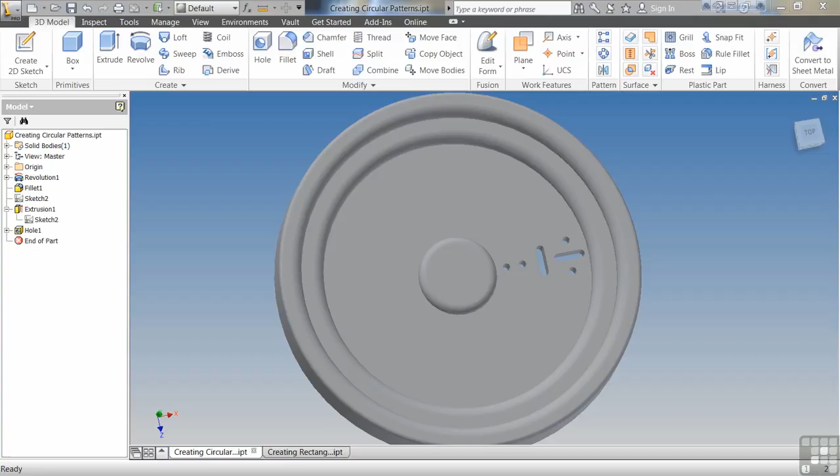In this exercise, we're going to be discussing creating circular patterns. To create a circular pattern, we go up to Circular Pattern Command under the Pattern panel on the ribbon. And it's pretty simple. We select our objects, and then we select our rotational axis. And you can see there's several different options we can choose for our rotational axis.

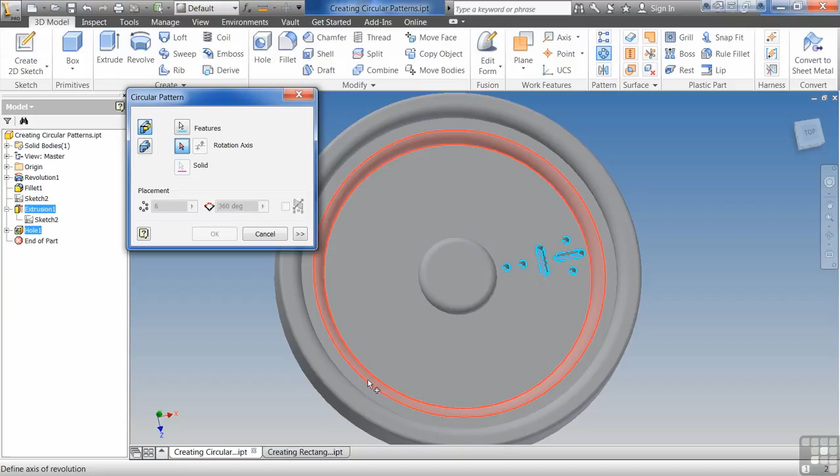On this part, since everything is concentric, it doesn't really matter what we choose because it's going to automatically choose that same center point. Then we choose how many patterns we want. We could even do a smaller amount, say 180 degrees, or if we knew what kind of pattern we were wanting to do there, say 75.

If I do 8, go back to 360, or even 180 here, I can decide if I wanted to go in one direction or both directions. If you do 360, you'll notice it doesn't really matter which way you go because, of course, 360 is 360. If you do like 90, we'll reduce them down here. You can decide, do you want this to be the middle out or do you want to go one way or the other?

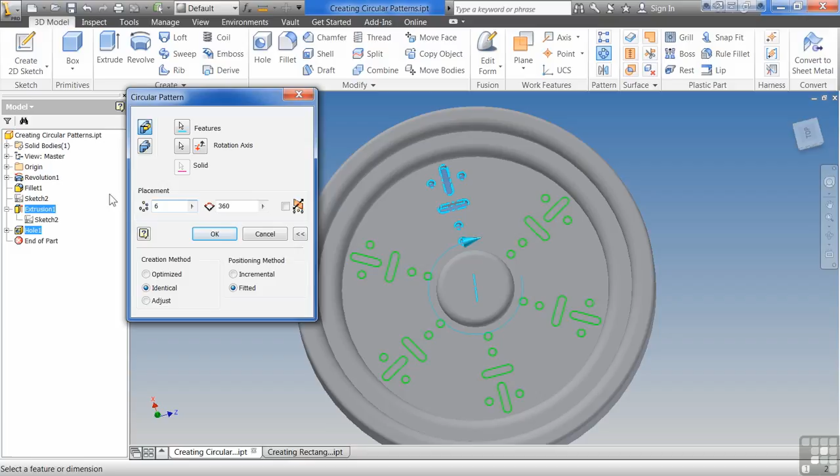Just like the rectangular patterns, we have our creation methods, whether we want to do identical, optimize, or adjust. For the most part, this doesn't matter on this exercise. As you can see, hit OK. So now you can see my nice little pattern in there. Creates kind of a snowflake looking thing. It's pretty straightforward. The nice thing about any patterning is we can suppress some of the patterns.

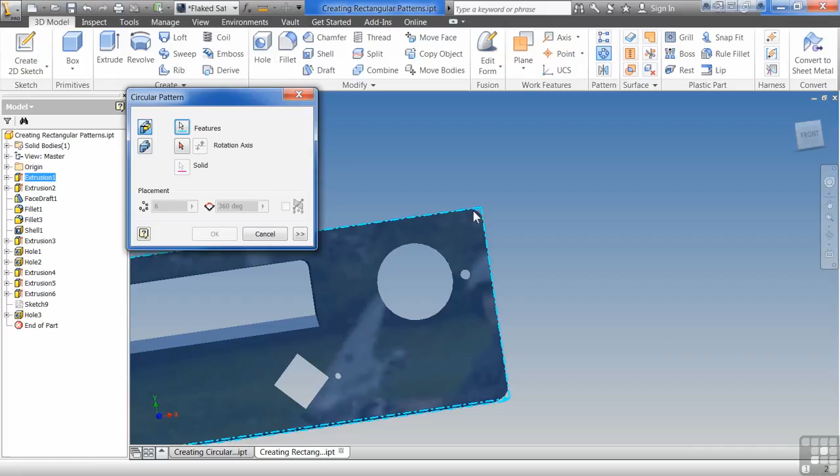If I come back over here to this rectangular pattern exercise we did earlier, and I go to the circular pattern here, you'll notice I grabbed the whole thing, didn't mean to. So I just select back on feature, hold down Control, and deselect it. I'm trying to grab that little bitty hole right there. Make sure I grab just the hole. And then for the rotational axis, I'm going to grab this circle here.

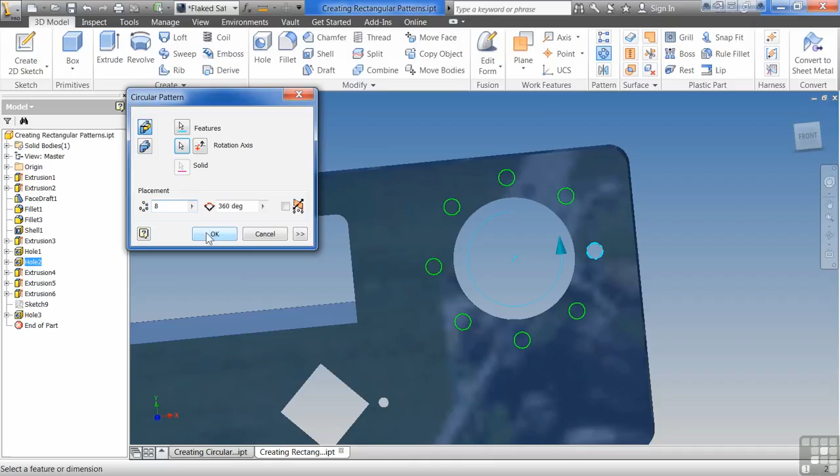I'm going to type in 8. I don't really want 8 holes here, but I want the location of the 8 holes. So I hit OK here. And then what I can do is I can come in here and find those 2 holes, right click on them and say suppress. So now I can have 6 of the 8 holes, but in the 8 hole pattern.

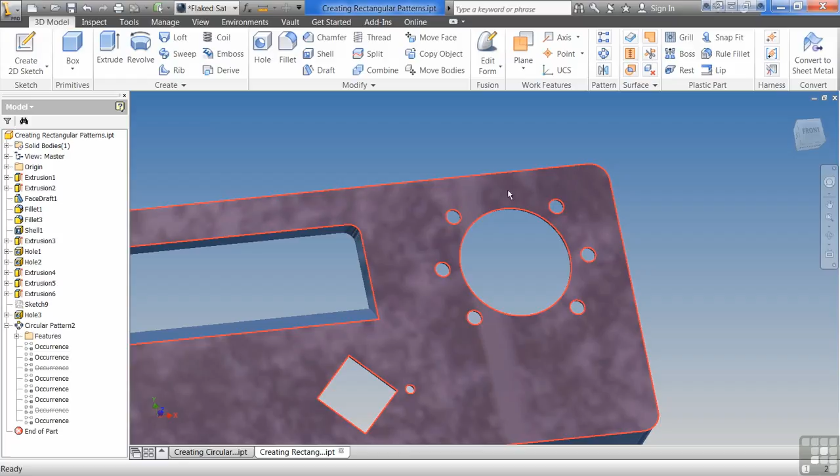I have run into this where it's necessary to do it because of things like this. I've also run into where it's necessary if this pattern was really close to this edge and it was going to cut off one of the holes. I may suppress that hole just because I don't want it to be cut in half, or I don't want it to come in here and interfere with my wall. There's various reasons you may want to suppress that, but you can suppress those.

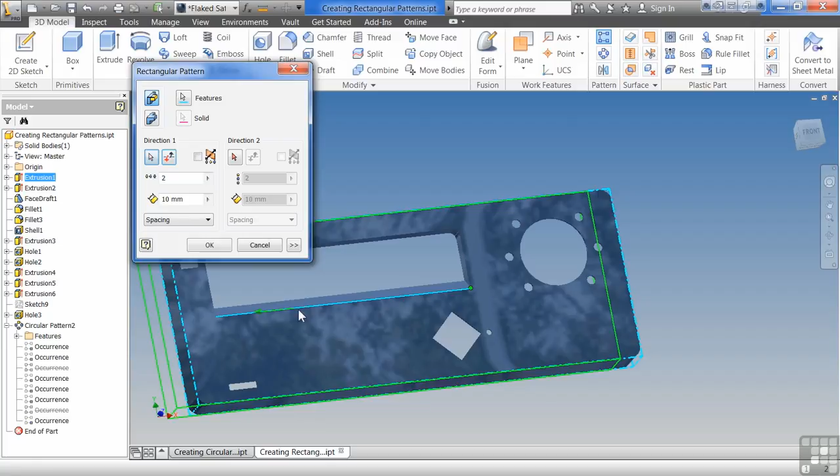The same goes for if we come back over and recreate our rectangular pattern that we did in a previous exercise. Once again, make sure you don't select the whole part. Make sure you select just that little bitty piece there. And if I recreate this 5 and 15, I think it was, go up here, 4 and 8, hit OK.

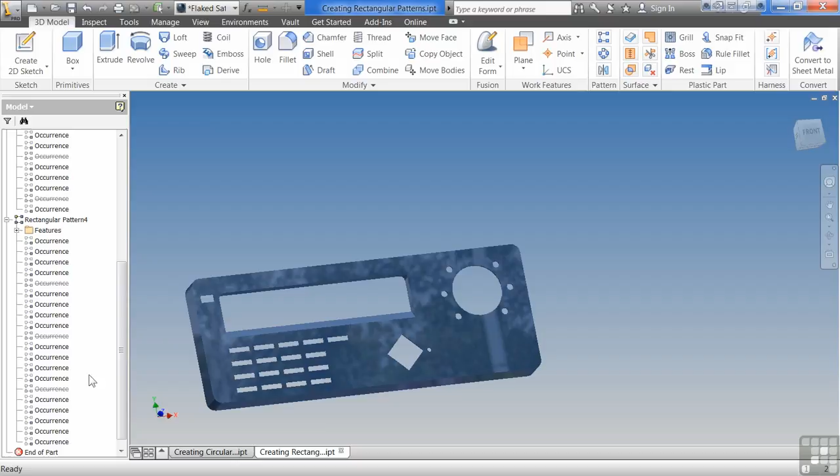I can do the same thing on here. I could come in here and I could say, okay, this hole, and this hole, for whatever reason, need to be suppressed. So you could have something that looks like that. So you can use suppress to be a very powerful tool.

For the most part, circular pattern is, to me, easier to use than the rectangular pattern. There's not a whole lot of options in here. There's not a whole lot of choices. It's very simple to use. Don't overthink any of the patterning. It's a very quick and easy way to reuse data as much as possible. Don't reinvent the wheel anywhere. Try to reuse data any way you can and save yourself the trouble.

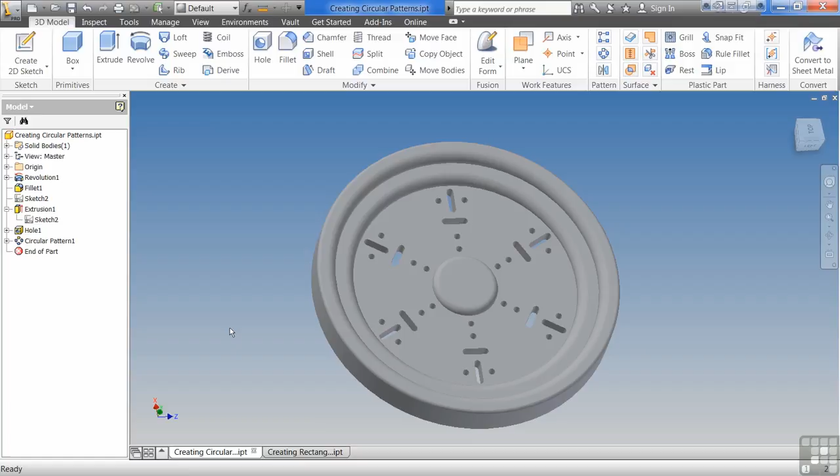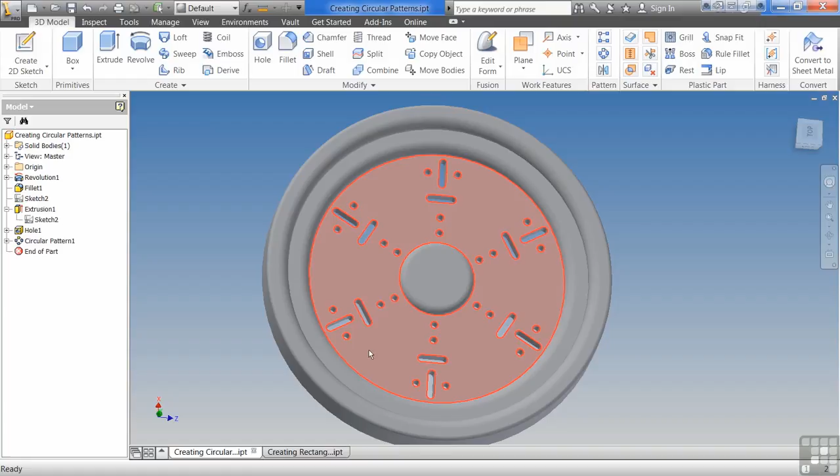Now, one of the options here would have been to pattern this in the sketch. To me, it's easier to pattern it as the feature because if I pattern this as the sketch, I would have to come in here and select. See here, I've got 6, 12 slots, and then I've got 4 times 6, so 24 holes. So I'd have to come in and select every one of these if I were doing this in a sketch. Whereas if I do it as a feature, I can just select 6 holes and then pattern the feature. So there are some benefits there.

Also, I've found sometimes it's easier if you pattern the feature calculation-wise, because you can do the one feature that doesn't take up very many calculations. You do it and you're done. Then you do the pattern. It may take a while, but it won't take up as much time as if you have to go in and edit it.

Because if you have to go in and edit every one of them individually or as an entire pattern, it can use a lot of memory to go in there and edit those in a real complex part. So by editing a single feature and then it being patterned, it saves you a little bit of rework time. So down the road, it's easier for me to draw it once and pattern it. Try to remember that, play with this, see what trouble you can get into here, and have some fun with it. Don't overthink anything in patterning. It is that easy to use.